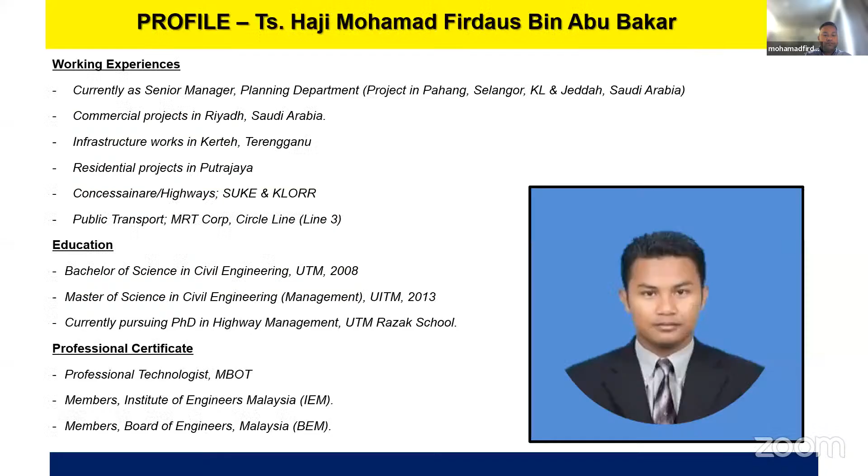So there are two elements I will share: the introduction of basic slope management with case study and procedures, and second, understanding the flow of document submission to authorities.

I'm currently working as a senior manager for a property developer, and most of my projects are in Genting Highlands, Cameron Highlands, Bukit Jalil, and some around Bentong. I also have another task in Jeddah, which is also related to slope.

Before that, I would like to express my huge appreciation to Jabatan Kerja Raya, because recently, as you know, there was a case in Batang Kali involving a landslide, and JKR did a very good job, well done to them. I salute them for preparing this infographic, so a huge compliment to them. I'll show and share this infographic with you.

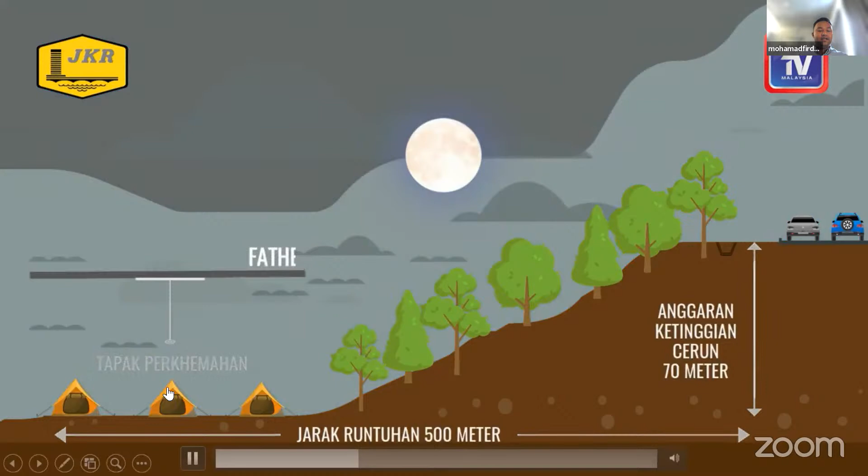This incident happened on 16 December in Batang Kali. Nearby is the Father Organic Farm, FOF, and there's a glamping area down there. The first landslide happened around 3 a.m., if I'm not mistaken, hitting the glamping area. After half an hour, the top went down, bringing down all the trees and hit the glamping area again.

If I'm not mistaken, there were more than 30 fatalities and 92 victims.

If you can see from here, this is a road. I was just informed by my contacts that one of the lanes here has been closed, and there's a flagman over there, over here, and over here. This road goes up to Genting, and this road goes down to Batang Kali. If you can see, it's approximately 500 meters. These are the glamping area and the organic farm.

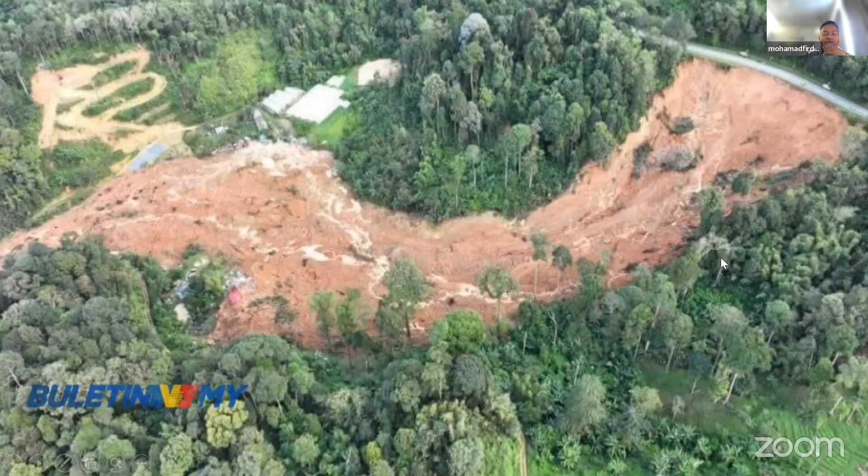So if you can see from this photo, it's quite crucial. From my experience, this is the most crucial disaster recorded in Malaysia right now.

Just an introduction to basic slope management. What does slope mean? According to Kamus Dewan edisi keempat, slope means steep hillside or cliff.

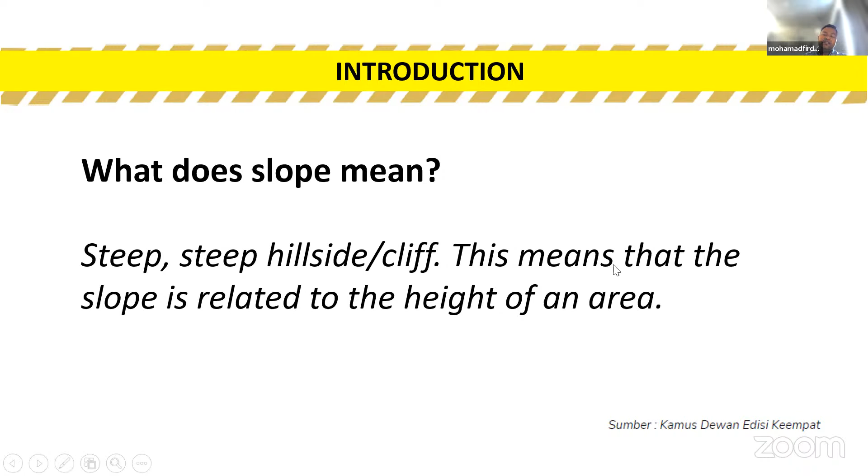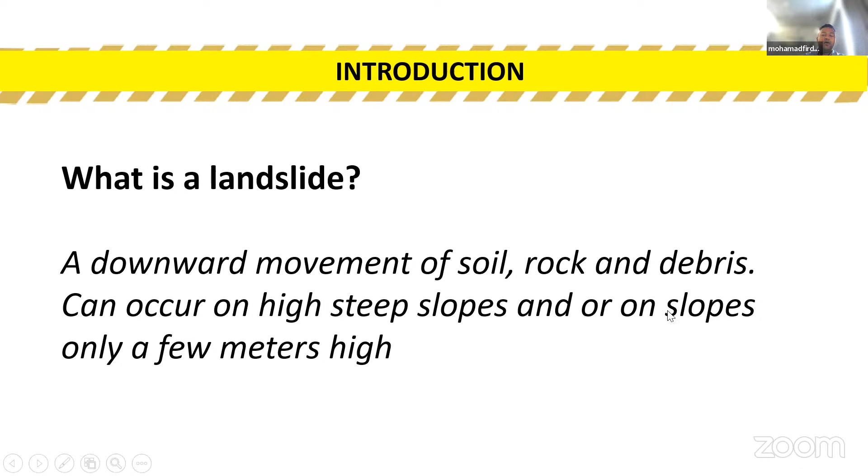This means that the slope is related to the height of an area. And what is a landslide? Just to recall, a landslide is a downward movement of soil, rock, and debris. It can occur on high, steep slopes or on slopes only a few meters high.

Again, just to recall, these are some of the methods of slope maintenance that have been and are still currently practiced by most agencies in Malaysia, and monitored by the Pihak Berkuasa Tempatan and Jabatan Kerja Raya for every district.

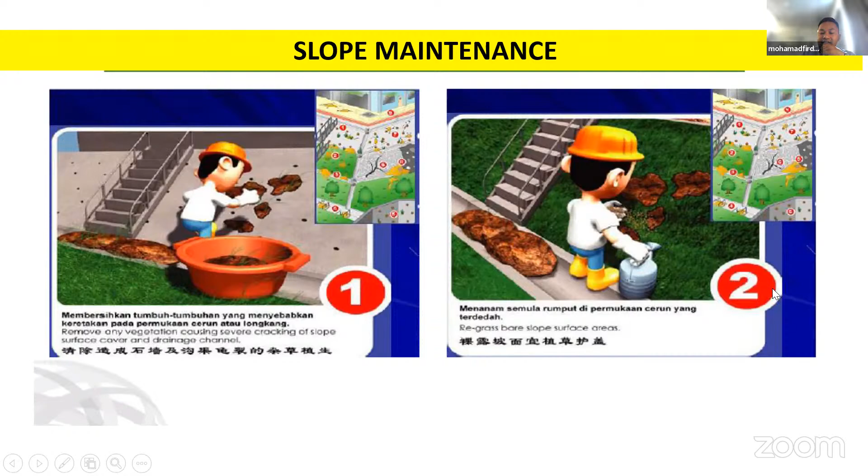So just to recall again, this is the first item on slope maintenance: to remove any vegetation causing severe cracking on the slope surface cover. Item number 2 is to replant or regrass the slope. Item number 3 is to repair any cracking at the drain or pavement.

The next item is to clear any debris from the drainage or U-channel. Next is to unblock or clear anything, sampah or other debris, inside the weep hole, so that groundwater can flow out through the weep hole consistently, and to make sure water is not retained at the back of the retaining wall.

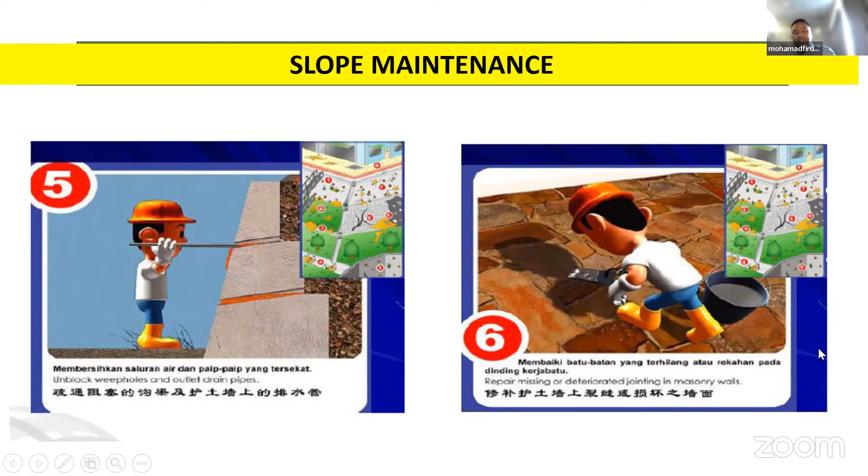Next is to repair missing or deteriorated jointing at the surface of the slope, and also to repair or replace any crack or damage, to remove any rocks remaining on the slope, and last but not least, to investigate and repair any buried water carrying services.

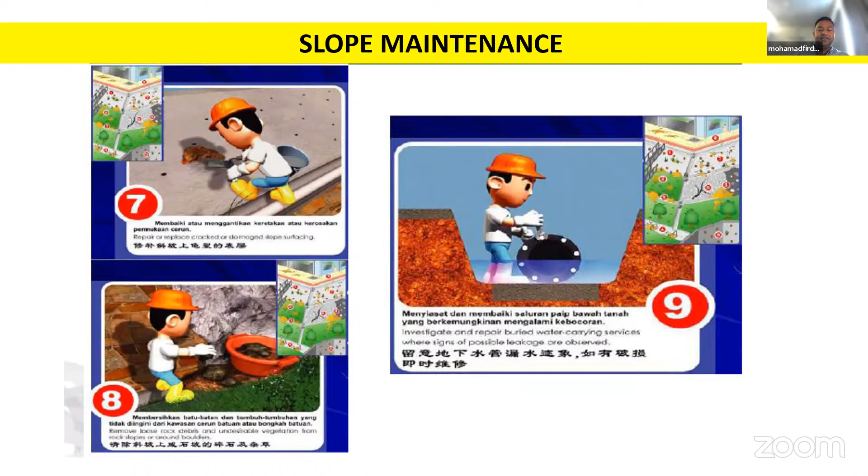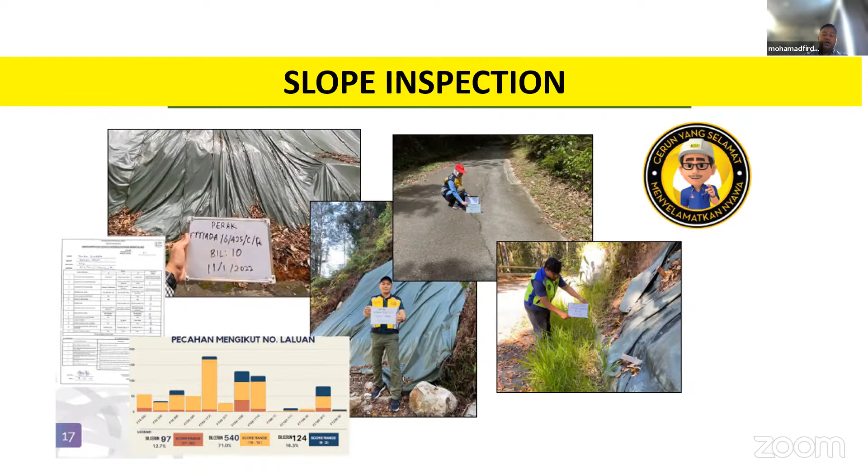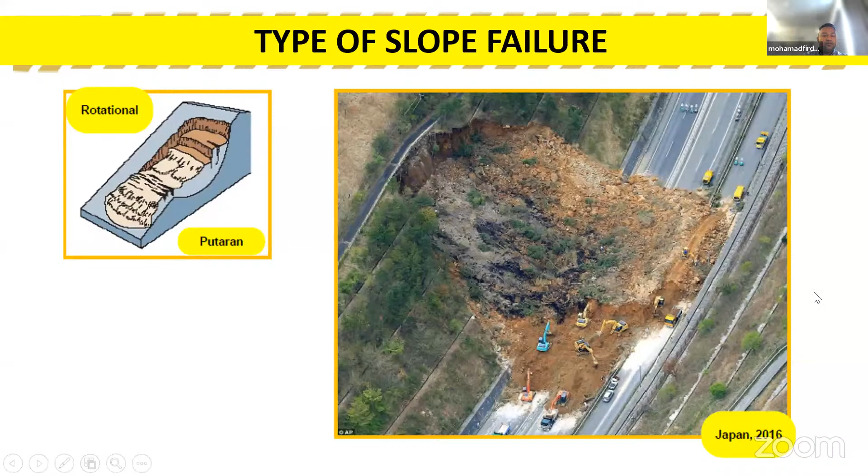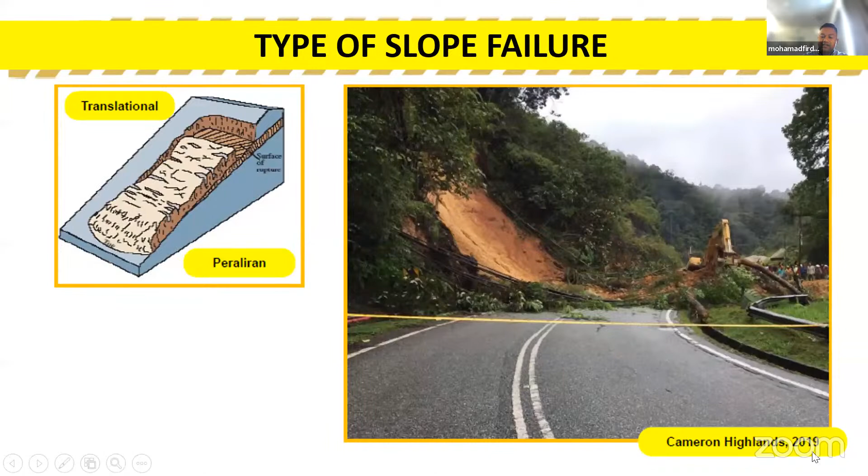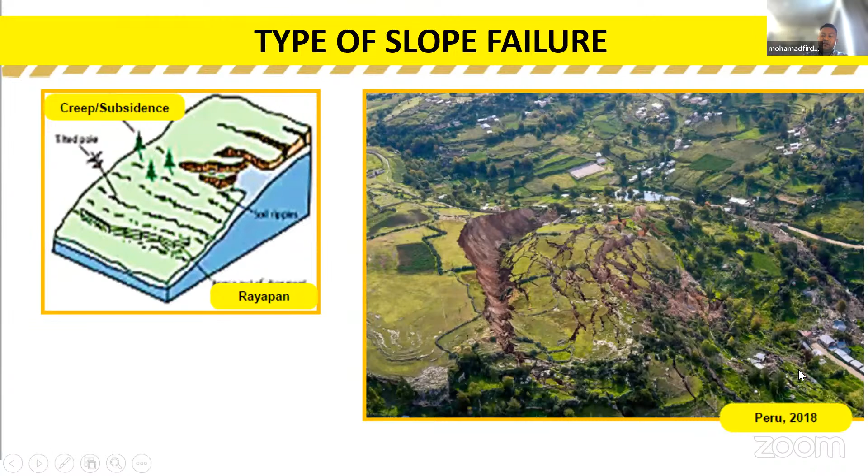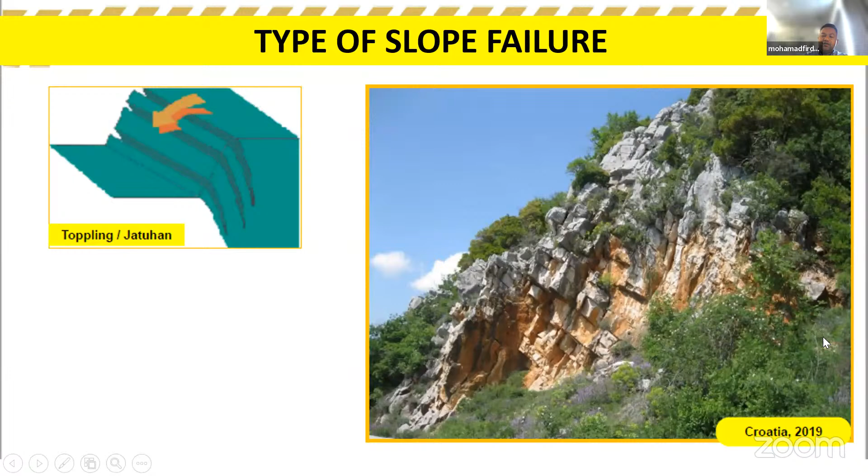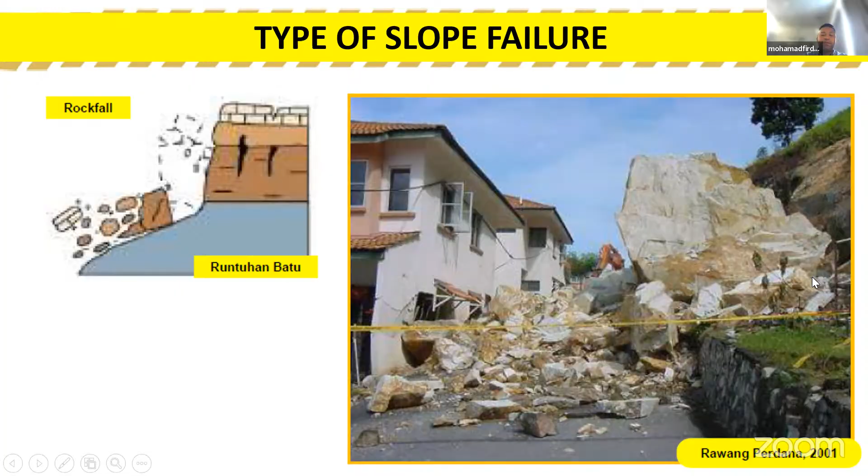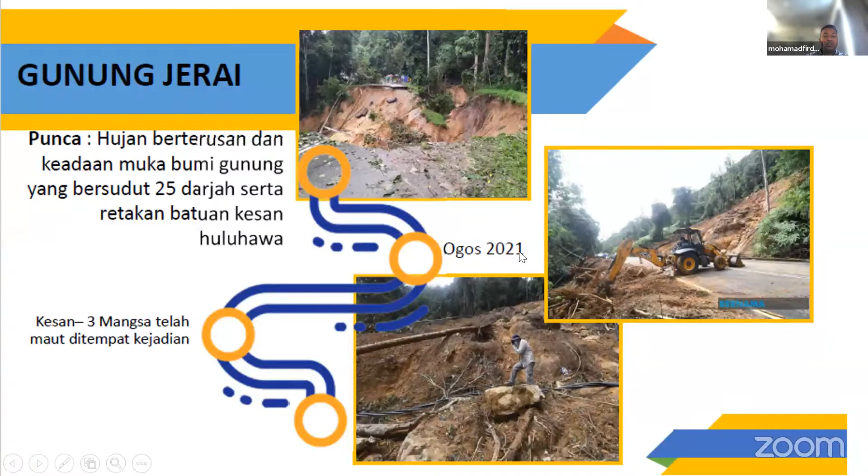They found and identified that long and heavy rain, and the condition of the terrain which is more than 25 degrees, were the causes of this 2021 Kedah incident.

Next, in Jalan Teratai, Taman Bukit Permai - I find this one quite interesting because, based on my experience, this incident happened very near the highway in Ampang. This happened in March 2022, and the impact affected more than 15 units. From the news, there were 4 fatalities, and the root cause was very long and continuous rain.

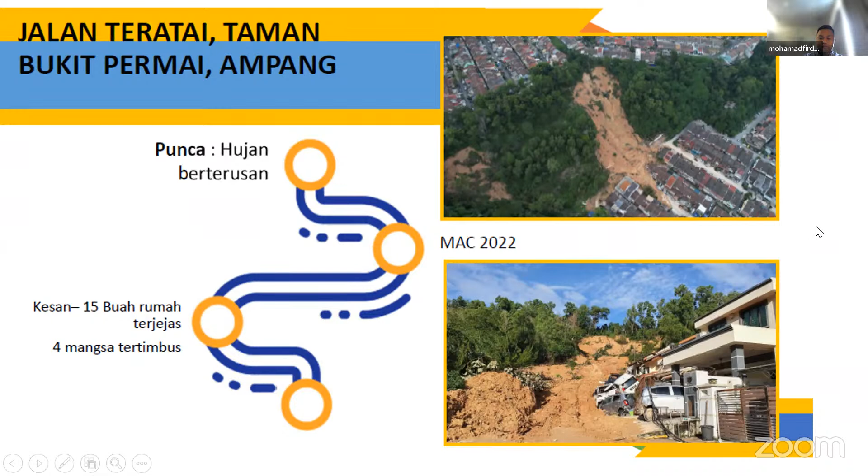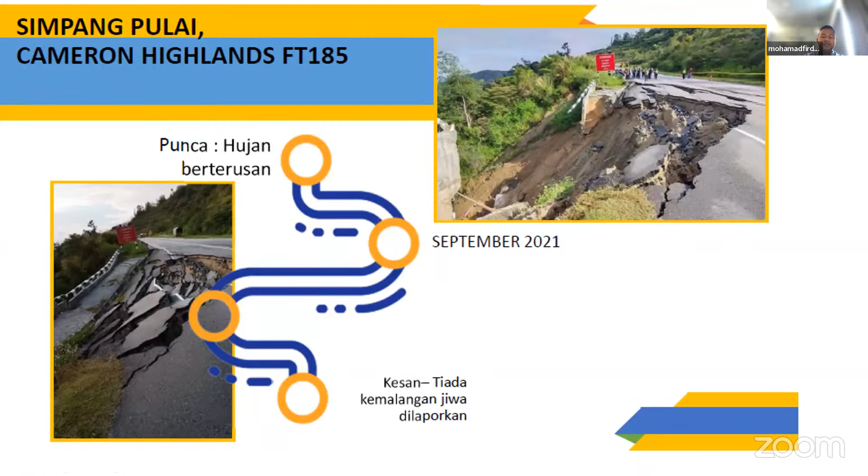Next is Simpang Pulai, Cameron Highlands. This is the road from Sungai Koyan going up to Cameron Highlands, and the root cause, as reported, is due to long and heavy rain. It happened in September 2021, and there was no fatality or injured victim.

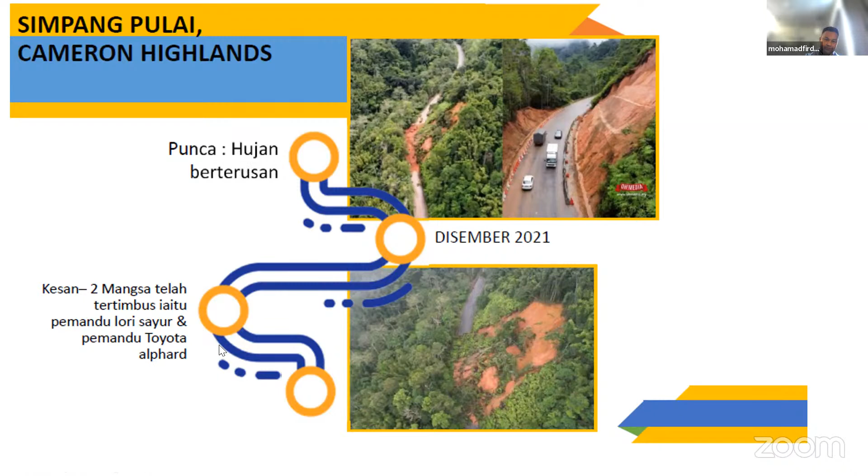Again in Cameron Highlands, Simpang Pulai, in December 2021 - also because of heavy rain, there were 2 victims buried, affecting 2 vehicles.

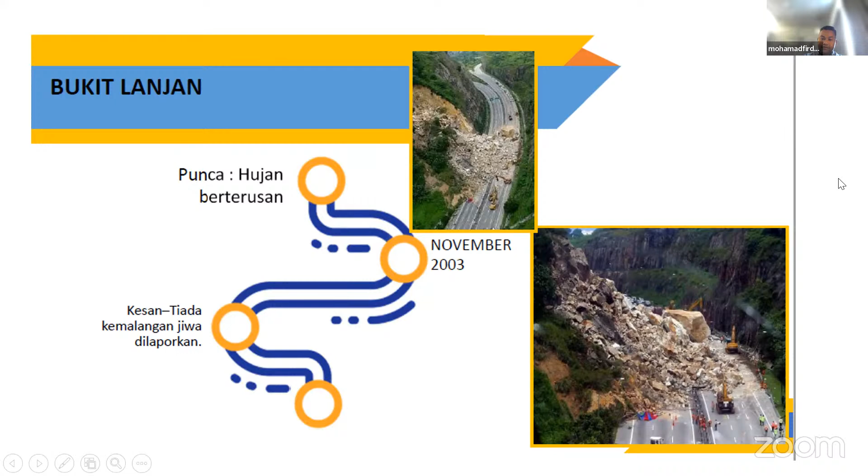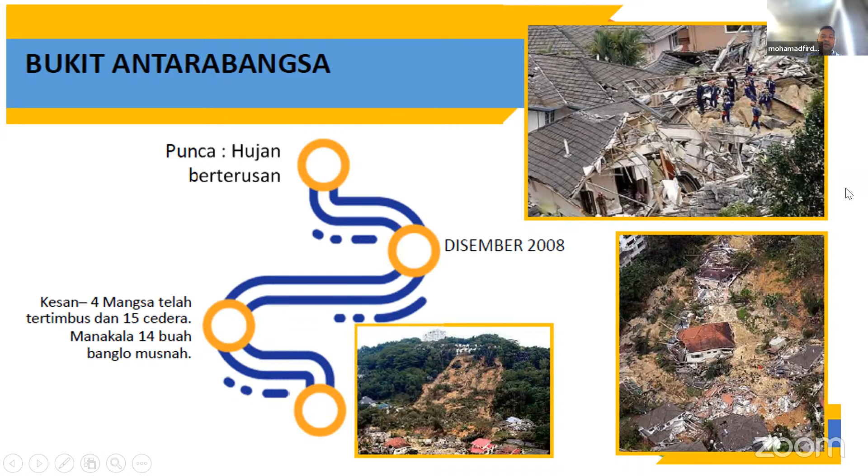This case in Bukit Antarabangsa, due to heavy rain, happened in December 2008. There were 4 victims, and another 14 bungalows were affected.

Next is the resort in Tambun, Ipoh. Again, the root cause was heavy rain. It happened in November 2020, with 2 victims buried.

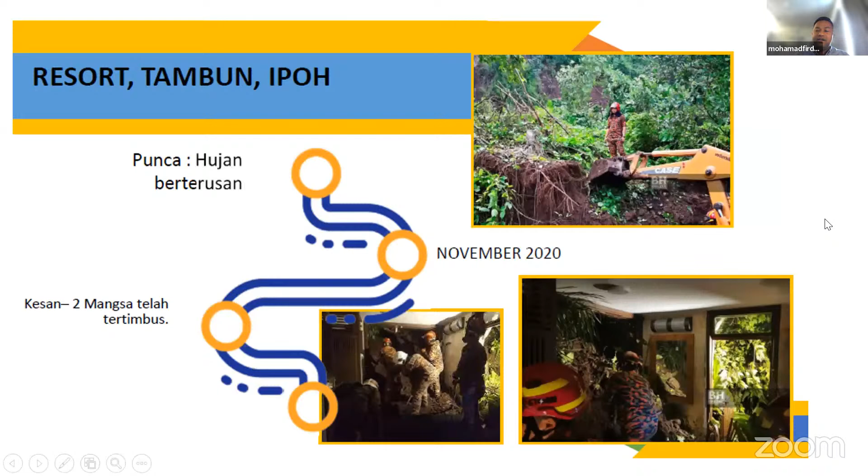I gathered some of the important incidents, and if you can see, most of the major accidents related to landslides are from Pahang. We notice that during the rain season, flooding normally occurs, and other than Selangor, the major state affected is Pahang.

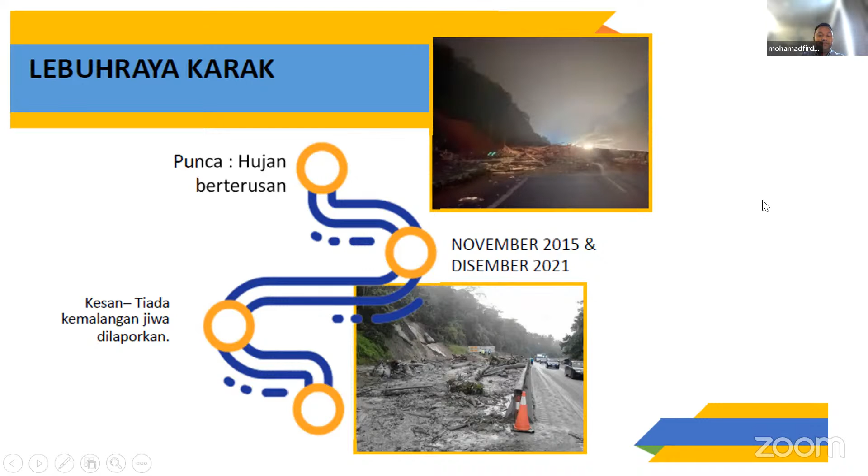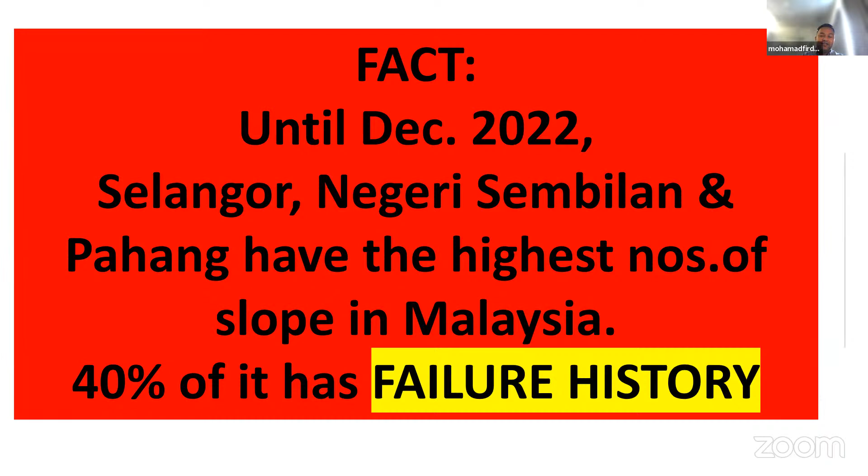This is the fact, up until December 2022. Selangor, Negeri Sembilan, and Pahang have the highest numbers of slopes in Malaysia, and 40% of them have a failure history. Can you imagine, 40%? It's quite crucial, as reported by JKR.

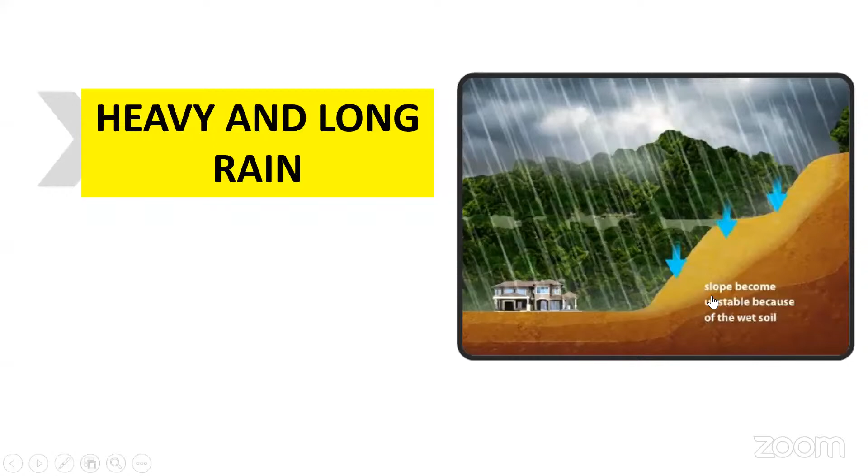Okay, I just want to explain, before that— Encik Firdaus, your mic is muted. Okay, now? Okay, now okay. Okay, so I continue.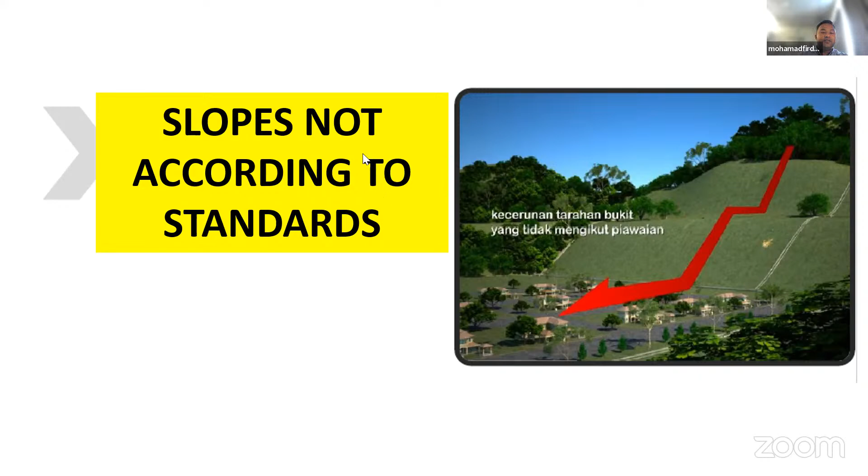Based on the study and investigation by JKR and other relevant authorities, there are some major factors that contribute to landslides. One is slopes with heavy and long rain. As shown in the previous case studies, most of the affected areas were in Pahang and Selangor, based on rainfall data, and as we know, flooding normally occurs in both states.

The next factor is slopes not according to standards. As you can see in this photo, based on my experience with inspections with JKR and others, there are 1 and 2 berms here, which is basically accepted by JKR. If I'm not mistaken, the maximum number of berms allowed is 6. So based on this photo and my judgment, the issue is not according to standard because of the slope ratio — the minimum required by JKR is 1 to 2, but from this photo it looks like 1 to 1. So this one is not acceptable, although the number of berms can be accepted.

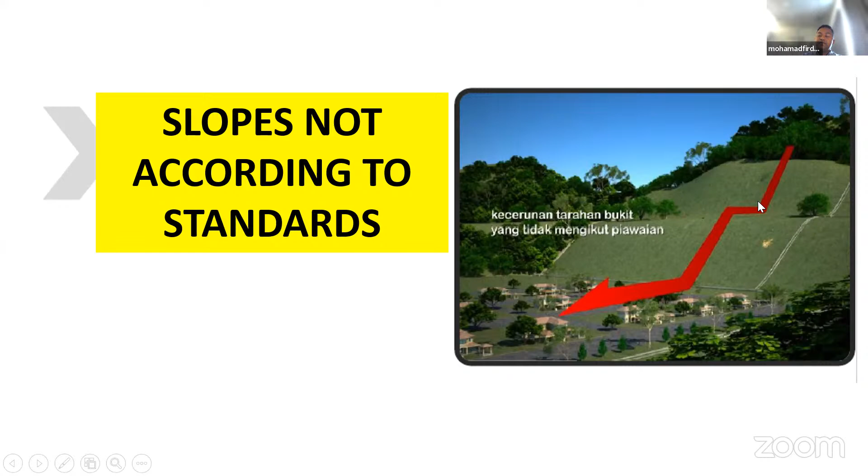Also, the next factor is slopes without effective drainage. As you can see, there is a 1-2 berm with a cascaded drain here, but maybe the width of the drainage is not enough, and the gradient and so on may also be insufficient.

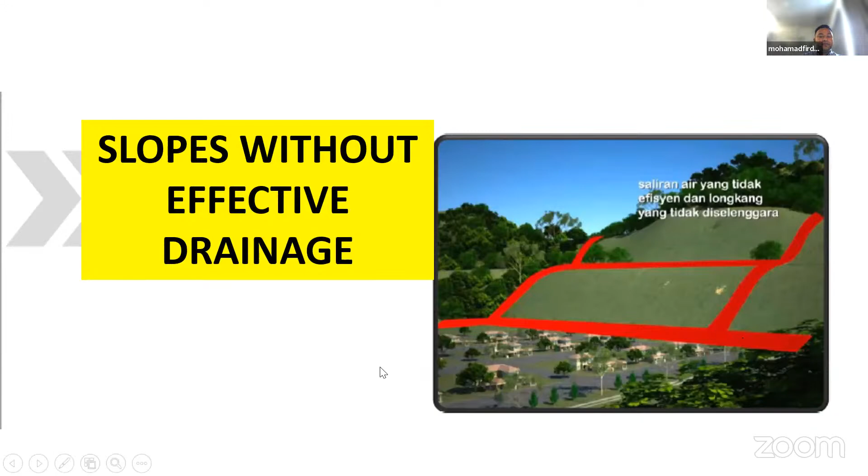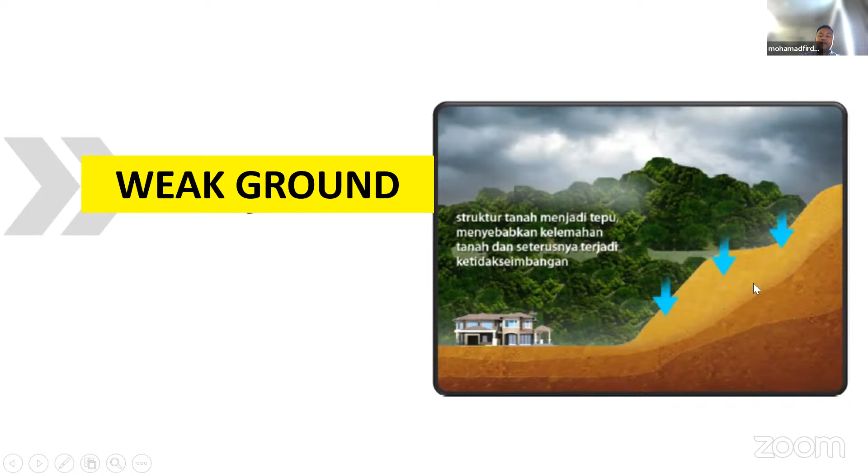Okay, next factor is the weak ground. So let's say on the weak ground, of course, the heavy and long rain will affect the soil at the slope there. So when it comes to some limit, if there's no protection, the soil will become weak.

Just to summarize some of the main causes of land collapse and landslide: one is the heavy rain. Second is geological factor, which is maybe some of the areas of development are located in very high risk areas. Next is development.

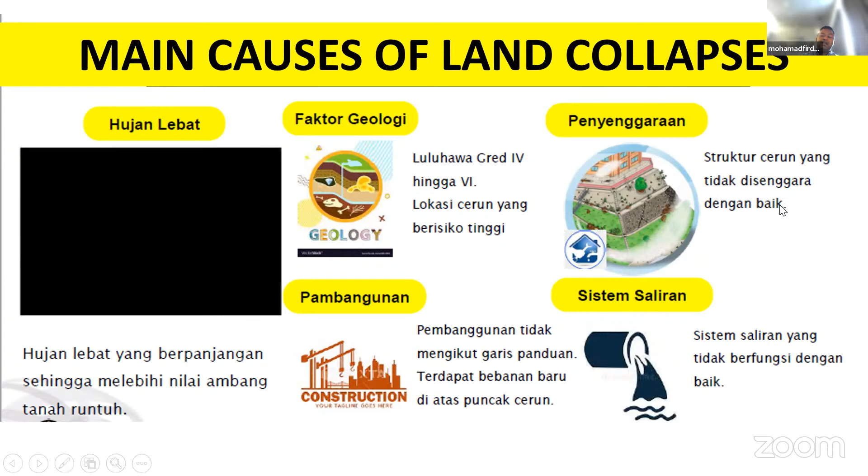Maybe the development of the highway infrastructure or housing are not complying with the requirements by JTKSAS. Maybe some cases are not enough buffer area and so on. And then next is maintenance - lack of maintenance, and also the drainage system.

This data I collected from the National Slope Master Plan, and from this, the most crucial factor that contributes to land collapse is design errors, design and construction. And then the next factor is rainfall and loading change.

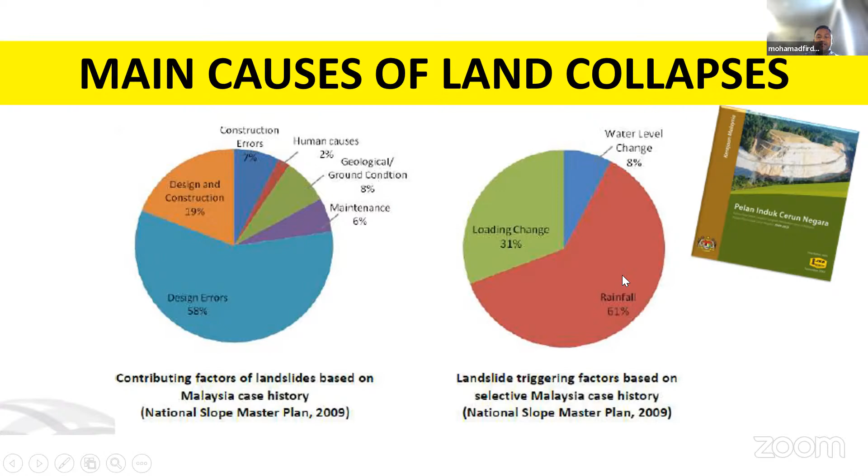Now we are going into the second element: understanding the flow of document submission to authority. As I said before, this JTKSAS, or JKSAS, or any name - basically JTKSAS is the name implemented for Pahang, and JKSAS is the name for Selangor. However, their role is the same.

This committee has been led by Plan Malaysia, and is under the custodian of Kementerian Perumahan dan Kerajaan Tempatan. So I just summarized some of the states that have implemented this - Selangor, I think more than 10 years ago, Pahang since 2017, and now other states are starting to implement it too: Melaka, Johor, Negeri Sembilan, and Perak.

The basic requirement of the Kawasan Sensitif area is all high slope areas where the slope is more than 25 degrees. I can show you the definition of class 1 until class 4 - this 25 degrees is more than class 2, so it falls under category class 2.

The involved agencies are, of course, the technical agency, the state government, JKR, JPS, forest department, and so on. Based on my experience, this JTKSAS application by the appointed town planner normally takes 3 to 6 months.

The charge, based on the current circulation by Plan Malaysia, if the development is less than 10 acres, the charge is about 3,000, and more than 10 acres is 5,000. I just got new information that this circulation will be revised soon.

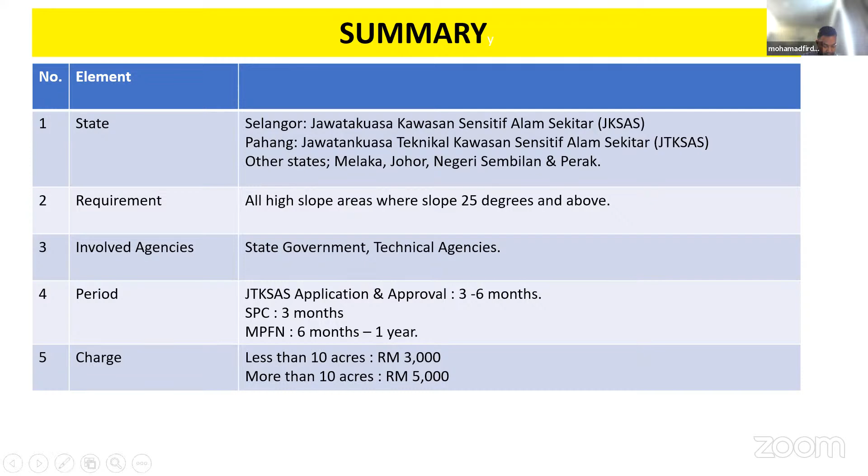Hopefully maybe in another 1 or 2 months, they will no longer rely on the charge based on acres. Maybe they will charge based on density instead. This figure I just want to emphasize.

Based on the basic requirement by JTKSAS, if the slope area is more than 25 degrees, it will fall under class 2. Based on my experience, normally in Genting, for example, there's more on class 2 and above, less on class 1. So this figure we must bear in mind.

Let's say any client, any pemaju, any developer, any consultant, or town planner wants to propose some development - they must make sure which class the area falls under, so that it's easy for them to start the design.

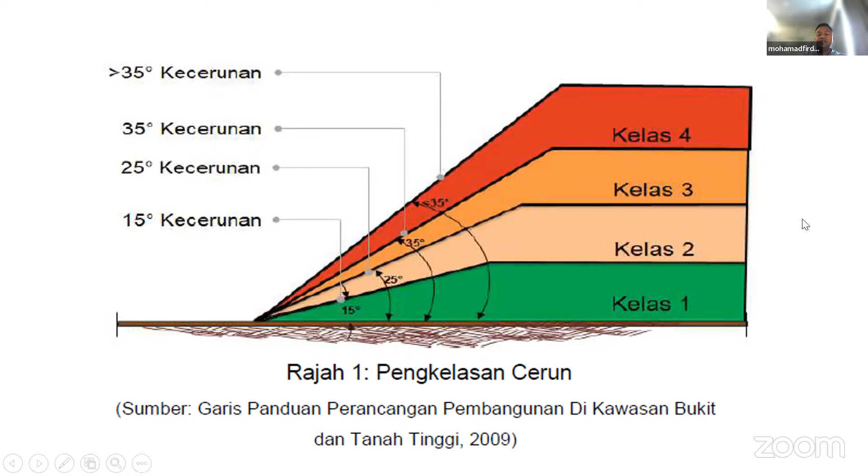This is a sample that I got from Plan Malaysia in Pahang. This is the SOP of the Jawatankuasa Technical Kawasan Sensitif Alam Sekitar, JTKSAS. No need to read this in detail, just to summarize - this committee has been started in 2018.

Basically this JTKSAS was established because there were a lot of landslide cases, and there was also a circulation by the Setiausaha of Kementerian Perumahan dan Kerajaan Tempatan in 2021, a new circulation. They advised that states normally facing this landslide problem must establish their own committee.

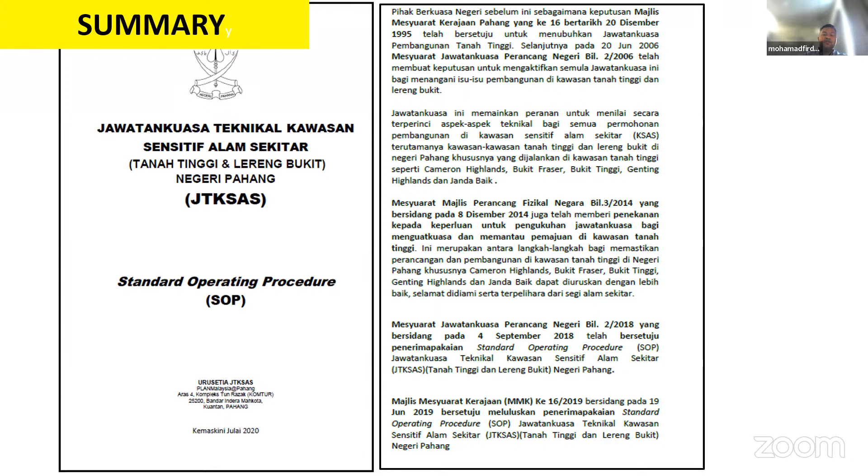Before I go to the flow chart, just to inform you, this JTKSAS is quite new in Malaysia. The significance of this committee is that, normally, as a town planner, consultant, or client, they will submit this development order, or kebenaran merancang, to each council, majlis.

However, based on my experience as a pemaju, I believe this committee and this flow is very good for the pemaju to detect issues at the first stage before they submit the development order application. What I mean is, there are 2 filters here.

Applicants submit the application to OSC, any majlis, and then they bring the paper to Mesyuarat OSC, the one-stop center, and then they get the result and decision.

For this first option, the significance is that the applicant will submit to the first filter, the Committee of Jawatankuasa, and then they will receive the application and distribute it to all the technical agencies related to that particular area.

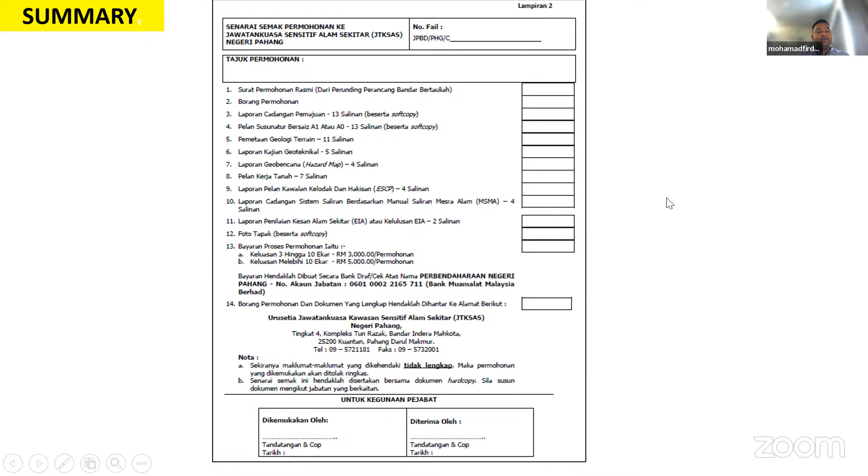This is a list of the Jabatan Teknikal that the application needs to be distributed to. If you can see items 1 until 11, from 2 until 11 is mostly on the technical part.

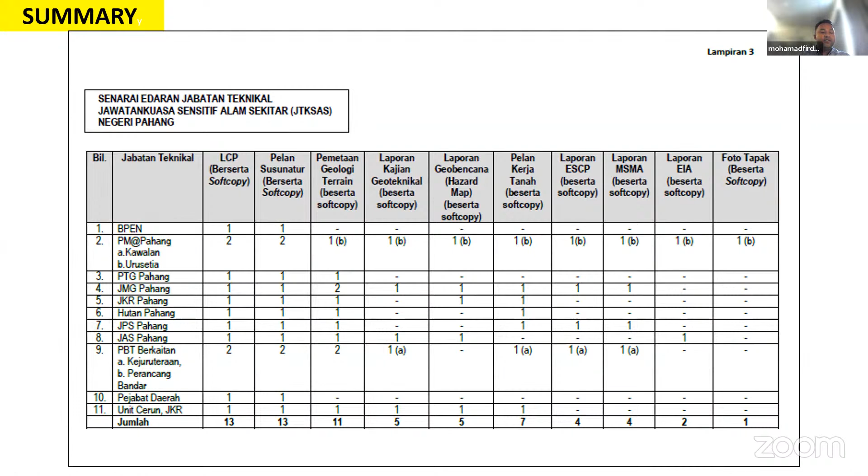However, there's one representative from the Setiausaha, Pejabat Setiausaha Kerajaan, which in Selangor we call the Unit Perancang Ekonomi. In Pahang we call it the Bahagian Perancang Ekonomi Negeri. So sometimes before you submit your Jawatankuasa application, you need to get approval or principal approval from BPEN, which is the representative of the Setiausaha Kerajaan Pahang. They will bring our proposal to Majlis Mesyuarat Kerajaan Negeri, and after that we can submit the application to Jawatankuasa.

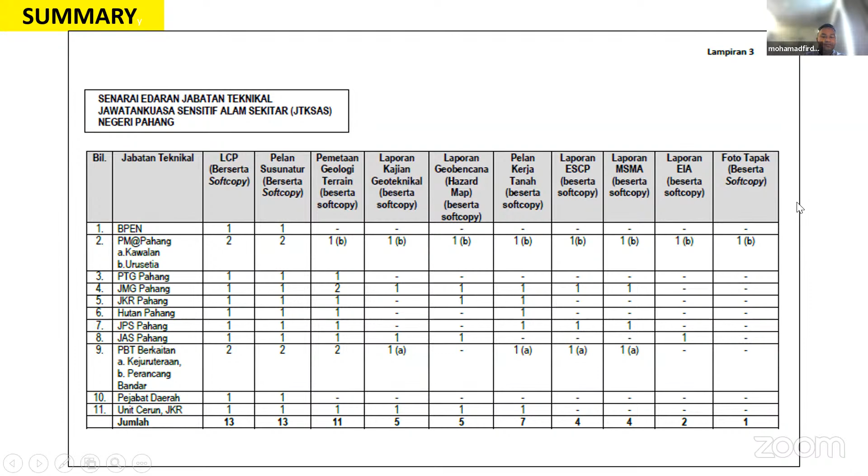There's a case study I want to share this morning, quite interesting, which involved me. This project is located in Midhills Genting, which, as you know, is a very common area where landslides occur, other than Cameron Highlands. This is about a 309-acre mixed development project, consisting of terrace, bungalow, rumah berkembar, rumah taman, and so on.

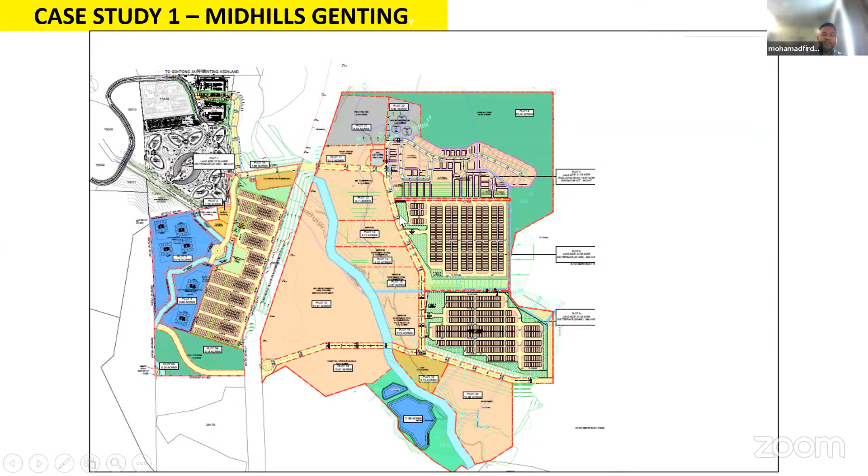So I just want to share this case study. This is plot A, about 64 acres, and plot B about 240 acres. What I want to draw your attention to is this.

Based on the consultant's judgment and design, the red color on plot B is the area that needs to be cut, the cutting area, and the blue is the filling area. Can you imagine this area? The reduced level is about 600 to 800 meters above sea level.

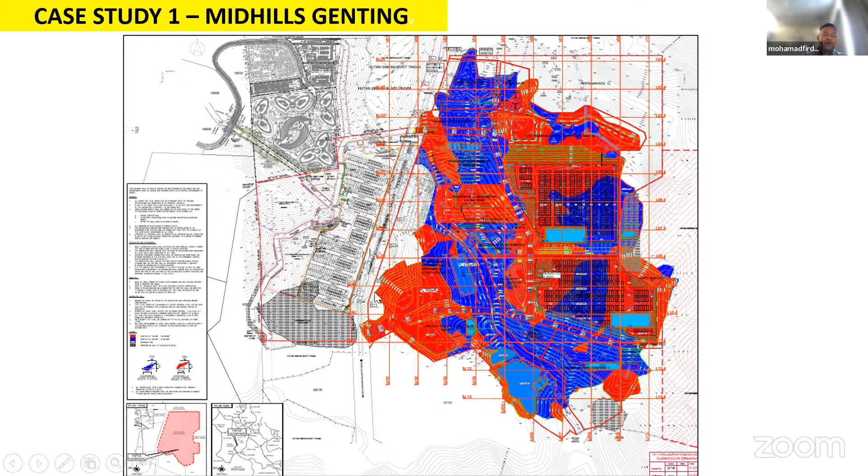Can you imagine how we want to cut, then how to strengthen the slope, and how to mitigate or propose the best method of protection for the slope? Based on my information, this cutting and filling volume is approximately 1 million cubic meters.

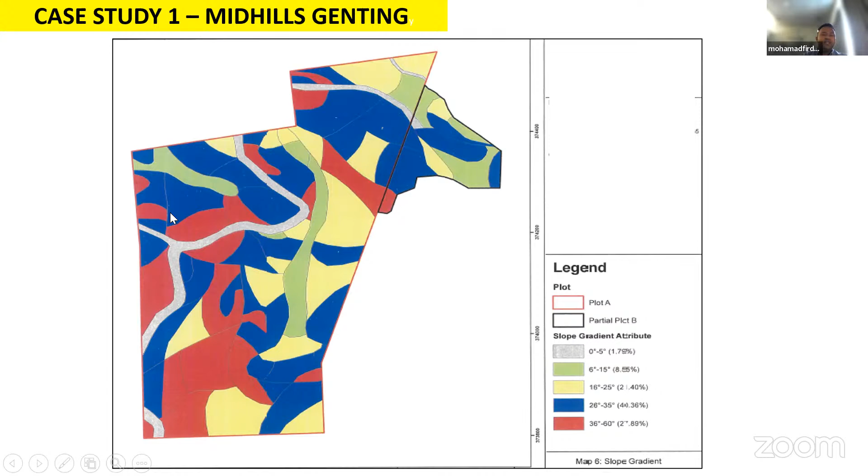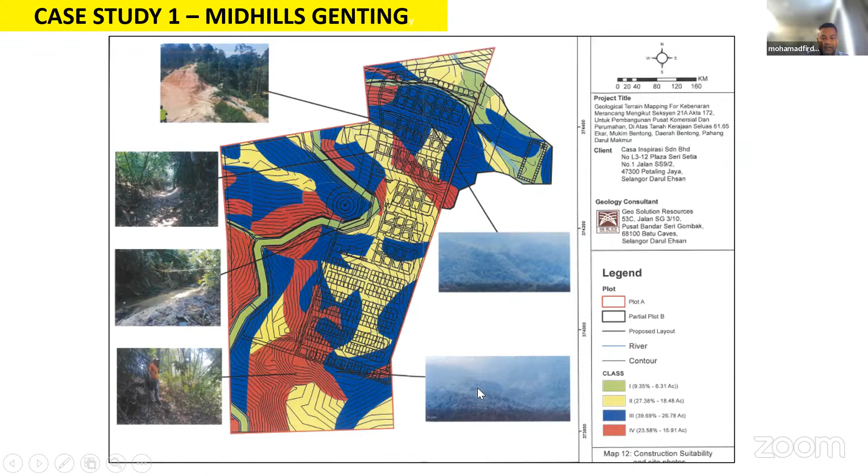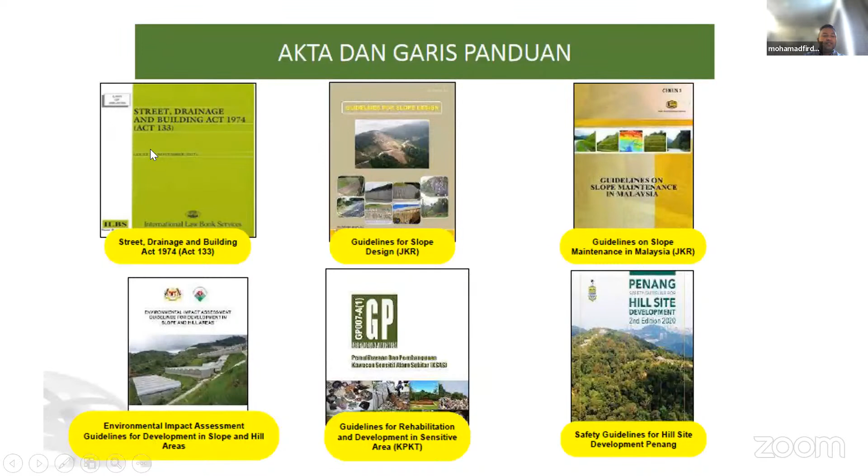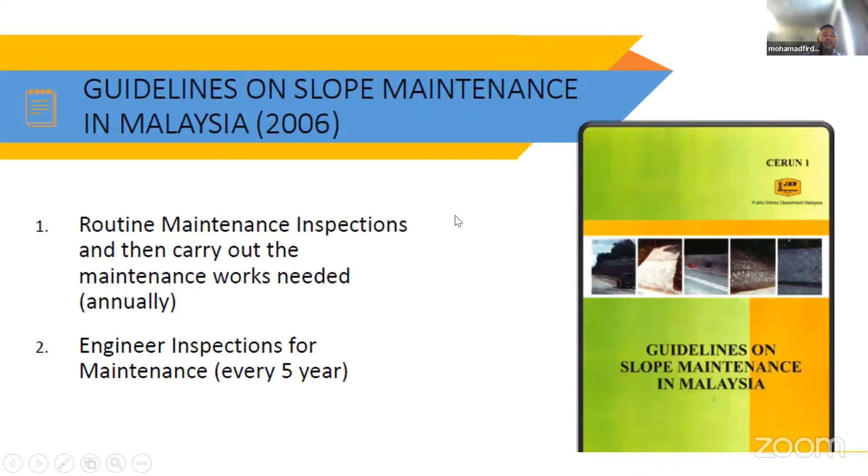Okay, these are some of the acts and guidelines, and then some of the summaries of the slope design. I will not touch detail on this. And also on the slope maintenance, okay, also by JKR. And then these are some breakdown from the regulation in landslide mitigation.

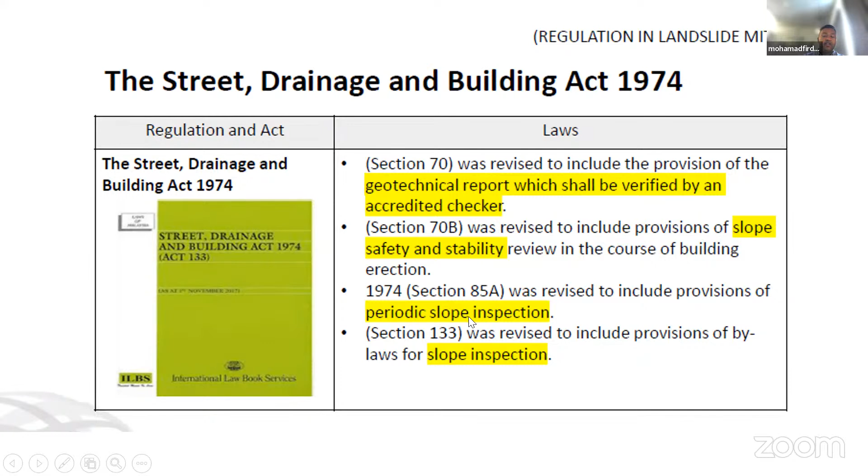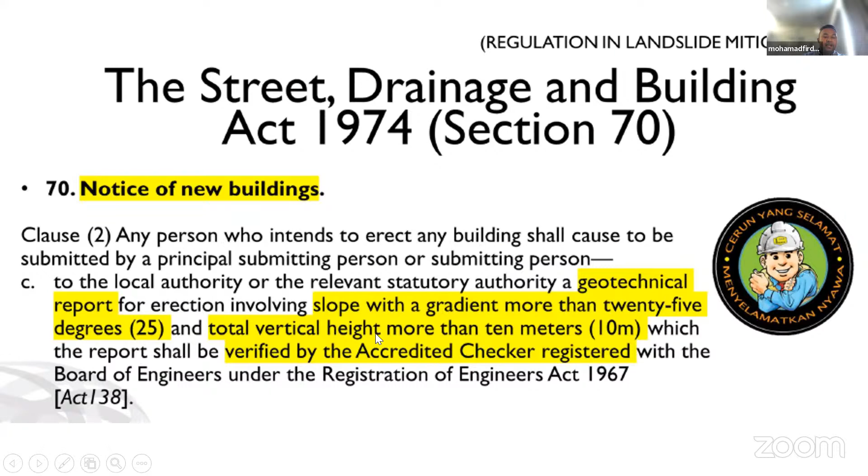This section 70 also emphasizes, if you can see the highlight, slope safety and stability, and also the periodic slope inspection. If you can see notice of new buildings based on this section 70 Act 1974, the requirement is the same: gradient more than 25 degrees and total vertical height more than 10 meters.

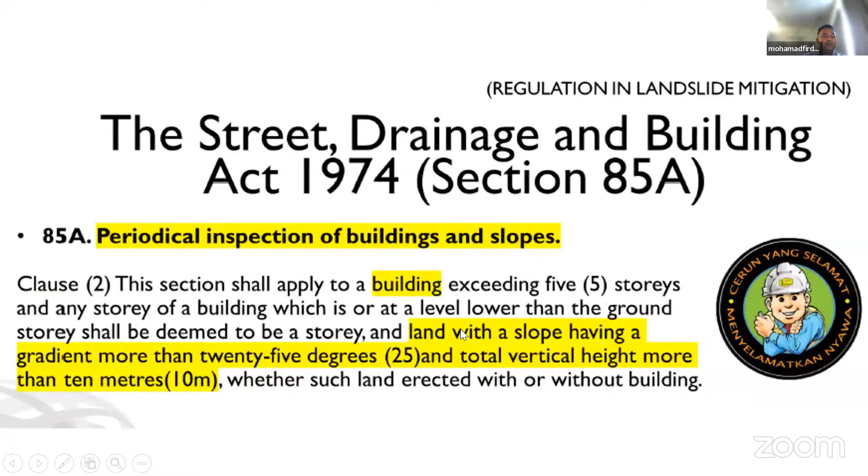Just this one for your info, the breakdown or the detail on the act, same. These are I just want to highlight: owner of a land with slope is required to have the slope inspected. That's why I told you in the early session, after or within 5 years. However, it depends on the case, and it is recommended by KPKT that all slopes need to be inspected within 6 months to 1 year.

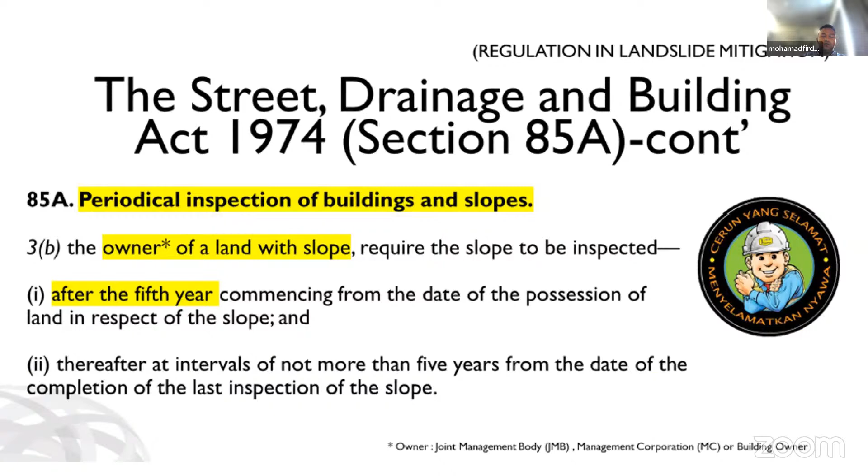And if you see there's some potential landslide, of course there are a few channels need to flow our complaint or aduan. So JKR have their own cawangan kejuruteraan cerun, which receives all the complaints, all the reports, especially on landslide potential problems. Like I said, this PAE is a very good channel to report or observe any initial sign of the landslide.

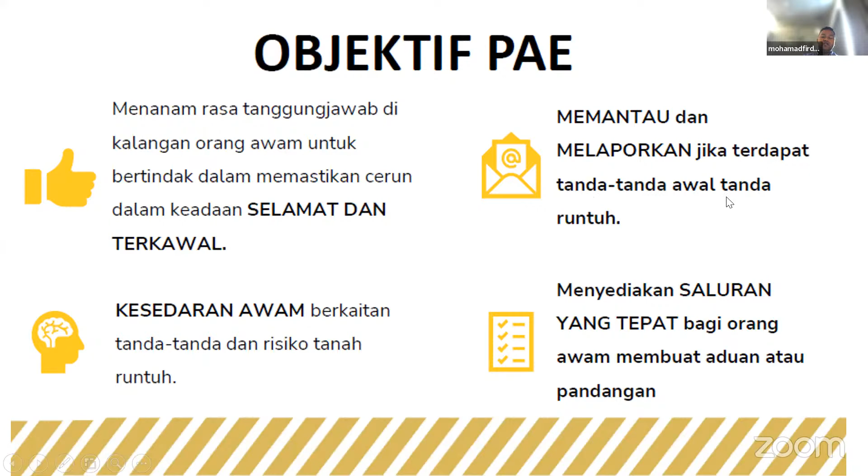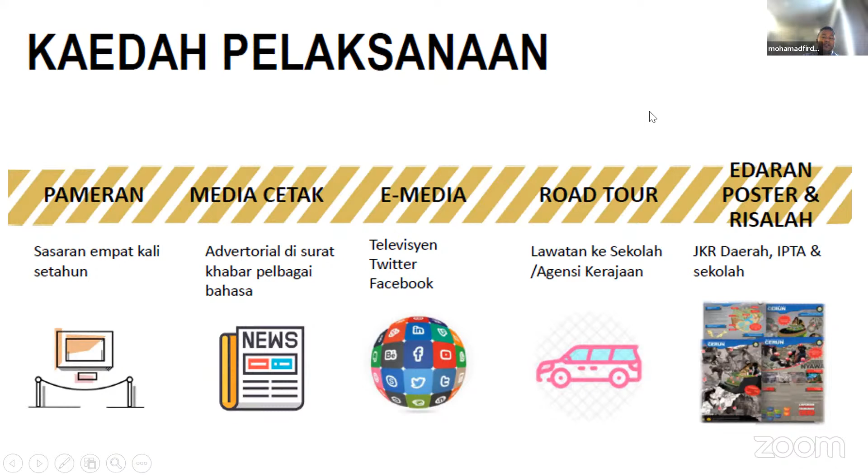Okay, based on JKR also they have their own pameran, their own platform, e-media and so on, road tour to make sure that all the public, netizens, Malaysians are aware of what happened.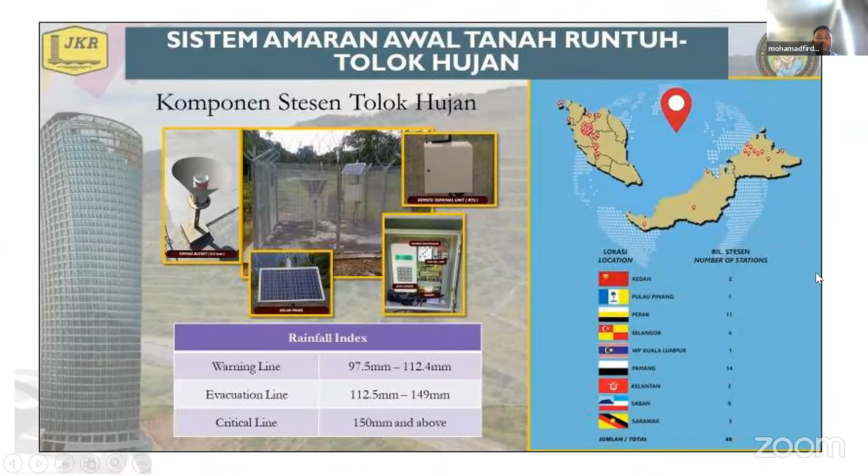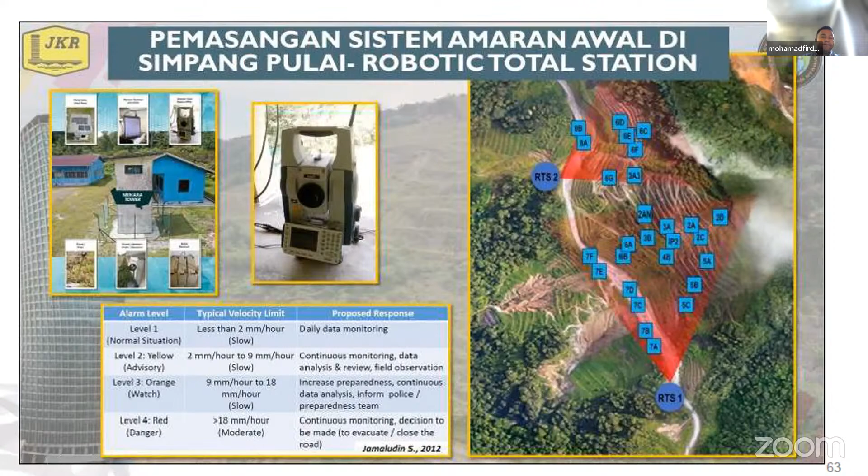And also to add on this, the early warning system, which we call robotic total station, has been installed along the Simpang Pulai, because of a lot of incidents and landslides happening in that area.

And then this slope risk mapping, as you saw at my previous slide, there's a red color there. I believe this one is class 2 or above. So this mapping is normally required and requested by JKR from any developer, client or town planner to show them the current data here, so that JKR will take note.

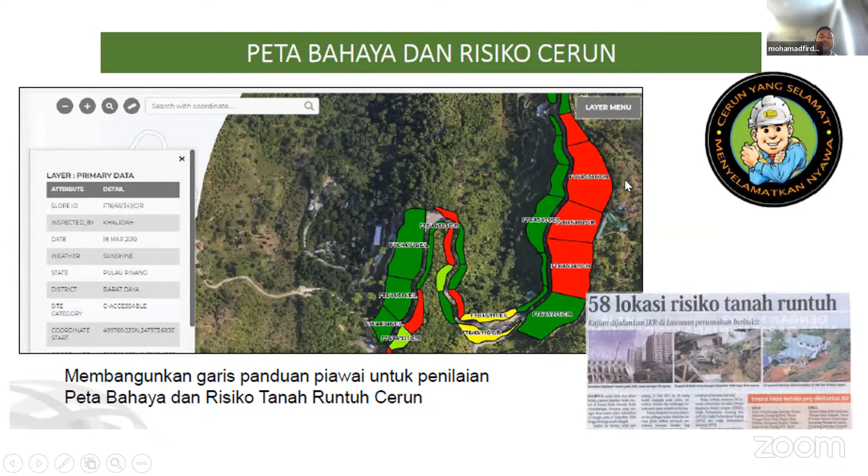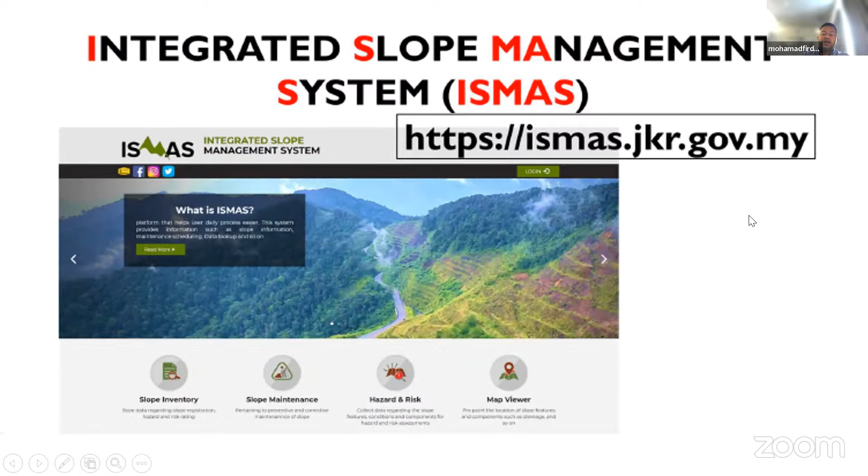Okay, one of the best methods, based on my opinion, initiated by JKR - we must salute JKR on this approach - JKR established the Integrated Slope Management System, in short form ISMAS. This dashboard, you can see here, you can try to access this link. Based on JKR data, all over, there's 26,000 over.

Okay, the slope area. From this, there's about 1,600 areas that can be categorized as very high hazard slope. This data is based on 2021, and I think it will be revised soon.

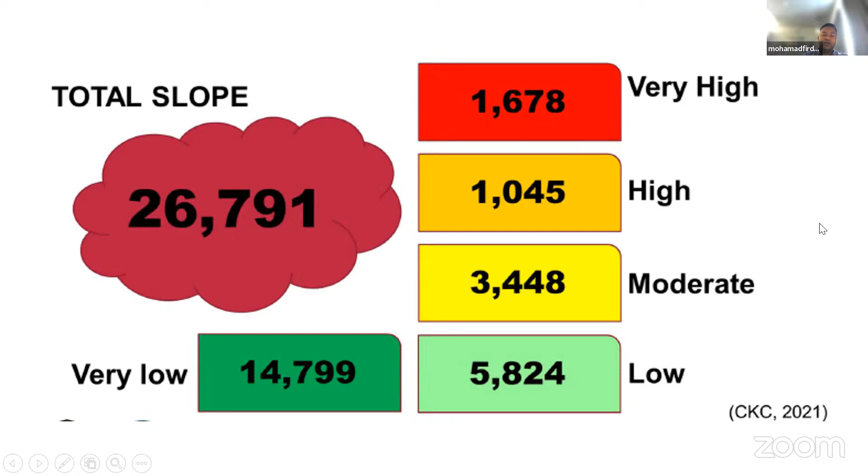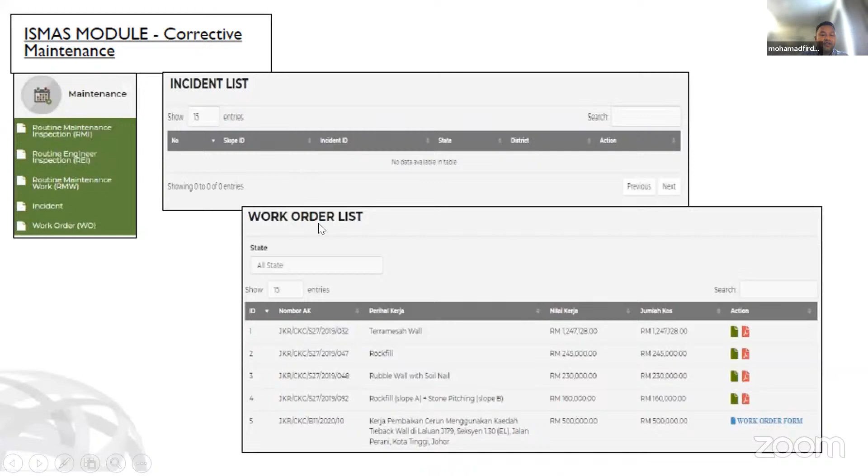Based on the ISMAS module, there's a sample dashboard showing the number of slopes along Federal Road, categorized as high and very high hazard slope. Using this mapping, the red color represents the most critical areas. The dashboard also has an incident list and work order list. If you have time, you can try opening this website.

As a summary of slope maintenance, based on my experience in housing development and highway development, I can recommend these 5 slope maintenance types that we normally practice in Malaysia.

First is retaining structure. Normally we use gabion wall, RC wall, and sometimes CBP, contiguous bored piling. But it depends on the space of the area, and also on the existing condition of traffic there, and so on.

Next is slope stabilization, which is more straightforward and used much less than retaining structures. Normally in Malaysia we use ground anchor, soil nailing, and also grid beam.

The third one is surface protection. Normally once we get a complaint or JKR gets a complaint, the common or typical fast mitigation is surface protection like planting and so on.

And then next is rock slope and others.

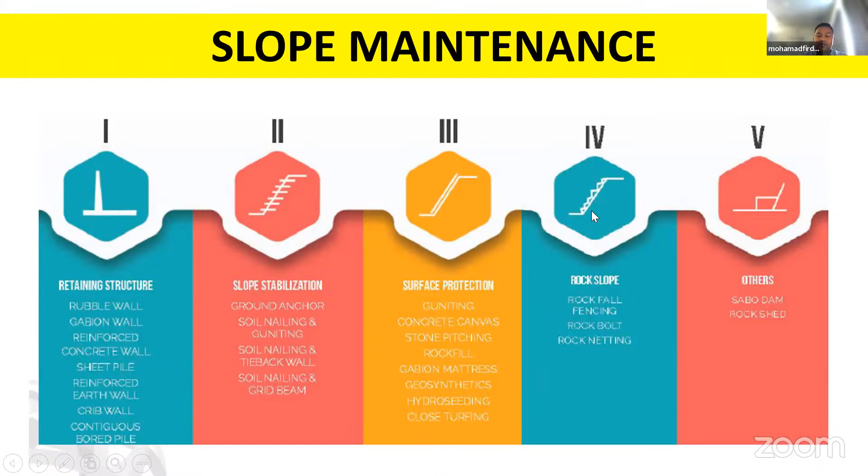Just to summarize a little on the topic, the main focus has two elements: one is basic slope management, and the second is submission to authorities. Comprehensive slope management includes stages of planning, design, construction, registration, maintenance, and community involvement.

What I want to highlight is that in slope management, if you cannot start with a good approach in the planning stage, I don't think the next stage will be successful.

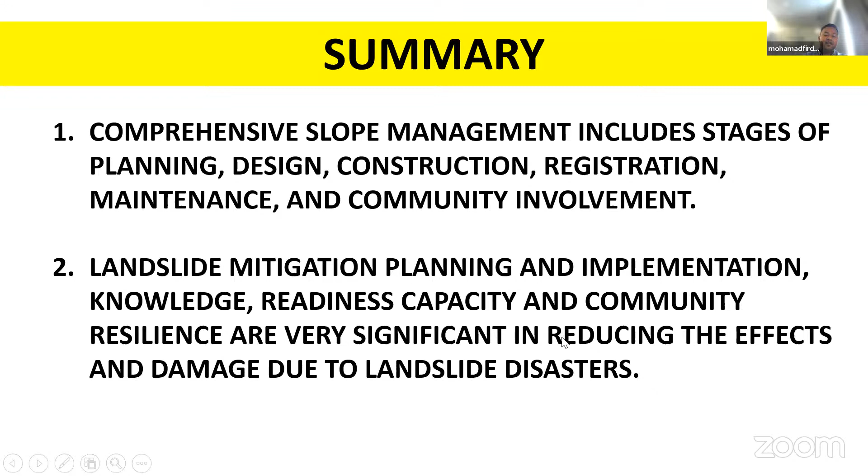Next is landslide mitigation planning and implementation. Knowledge, readiness, capacity, and community resilience are very significant in reducing the effects and damage of landslide disasters.

Based on my experience, this committee is very good, and at the first stage they filter whether our submission, as a town planner or as a client, is good enough to be ready or safe for the next stage.

The next recommendation is regular inspection during rainy season. The rainy season normally occurs from October until February, so maybe 2 or 3 months before the rainy season, all related parties or related agencies that

have custody of the slope in Malaysia, I think it's advisable to go for inspection regularly, maybe on a daily basis, before the rainy season occurs within this time period, so that any mitigation or fast approach of mitigation plan can be taken immediately.

Last but not least, on the audit of slope inventory data, at least 2 times per year or case by case. So that's all for me.